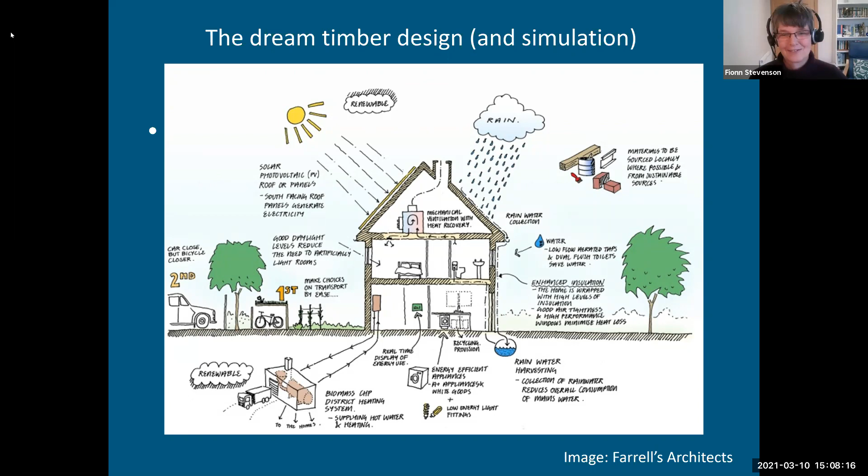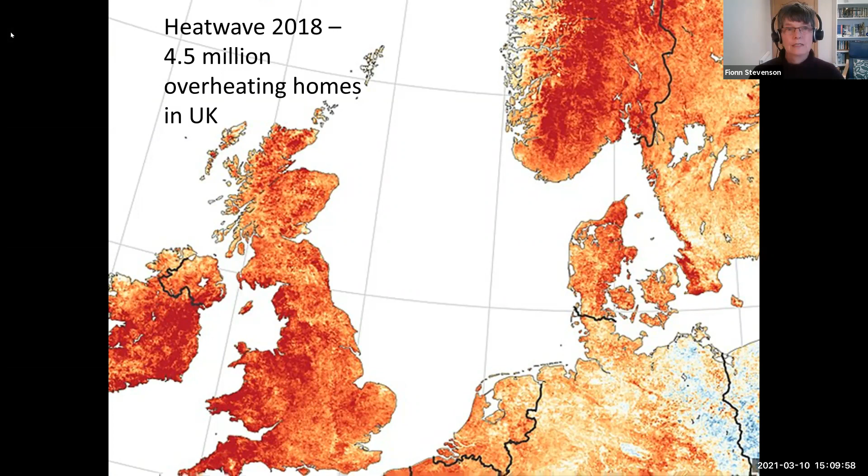Now, we've also got another energy implicated situation, which is the temperature rise on average across the world. And we had 4.5 million homes overheating just 3 years ago in the UK. And energy is also implicated in health issues. Fuel poverty is a major factor in housing. And often people try and save money, save energy, and reduce their heating. And that often has very dire implications in terms of potential mold issues, and mold spores cause asthma.

So we know our homes are underperforming, and translating that into an energy problem, we know from lots of research that's been done that homes in the UK very typically use twice as much energy as they're predicted to use. And the big debate is whether that is down to the building or down to the people or down to a combination of both. And my aim is to make sure that everybody agrees it's down to both.

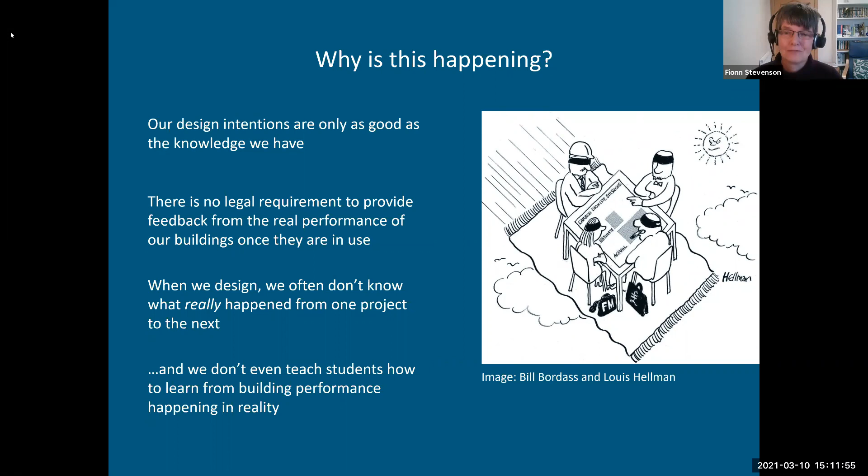And probably the biggest tragedy is that we don't even teach our students how to learn from building performance that's happening in reality. We teach our students about how to look at case studies. We teach our students environmental principles. But what we don't do is take them to buildings and demand that they actually carry out an environmental performance review of that building. That happens in very, very few schools of architecture.

So why should we be doing all this? It's blindingly obvious that, you know, if you carry out a performance evaluation of a building, you can improve both the building and the design process that was behind it. And you can improve both the product and process, the risks, the defects, the maintenance. You can also begin to future-proof it by understanding what's going on with the building for real. This makes happy people, and the happy people make happy customers. What does all this mean for energy?

Exactly the same, which is that in improving the process and the product, we can also help to reduce the energy demand, and we can help to eliminate unforeseen defects and unforeseen maintenance issues that increase energy demand.

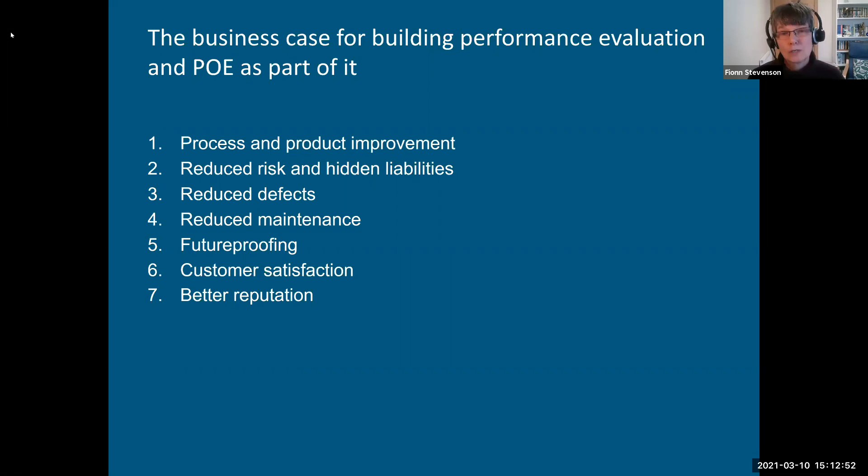So what I'm trying to do today is to steer us away from seeing energy as a single subject. Energy is implicated in the home everywhere and always. And that means really that we have to move beyond thinking just about energy to asking very, very broad questions. And these are 4 perennial questions that have been asked for decades now in post-occupancy evaluation.

Beyond understanding the energy demand, we need to know whether people's needs are being met. And we need to understand the problems that are happening now, but also how we can prevent future problems. And the real key contribution of doing post-occupancy evaluation, of looking at building performance for real, is that it helps us to validate the modeling that we're researching and producing, and it helps us to evaluate the simulation tools that we use. Without having that validation, these tools remain very, very blunt instruments.

So the basic approach that I would argue for is a multi-method, mixed methods research approach to thinking about building performance. And when we want to compare design intentions to reality, this means a mixed methods approach of both hard and soft data. And very often POE tends to fall on one side or the other. So we tend to get physical scientists doing the hard data, which is looking at the physical comfort, pollution, fabric performance, energy use, and water use.

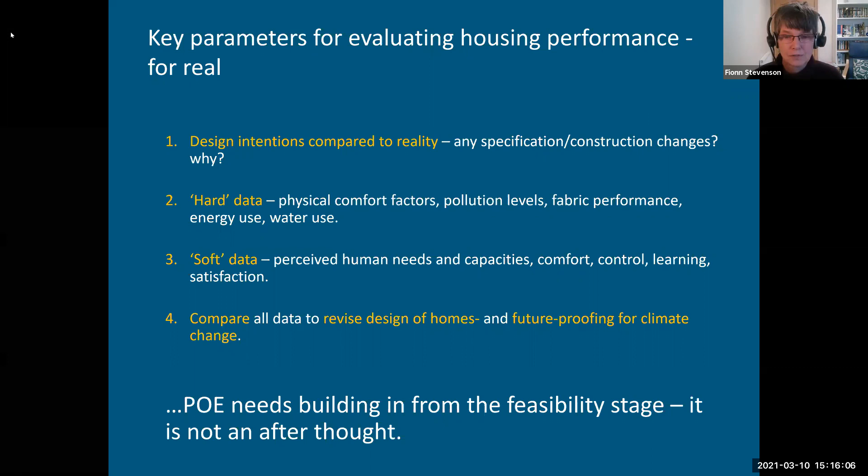So another big point I'd like to get across today is that when we're thinking about using the mixed methods, we really should start lightly, and we should only dig into monitoring and deeper forensics around building performance if it's really needed. And this was a lesson I learned from Adrian Leaman and Bill Bordass, who introduced me to post-occupancy evaluation by saying, look, Fionn, for God's sake, don't go out and cover a building in kit and monitor it to death. That's really not the point.

The point is not to monitor what's happening every day as a routine. All that does is tell you every day what's happening. And if it's the same every day, then it's the same and the same. The point is to design your research in such a way that it throws up the exceptions.

And it's a big challenge for us as researchers. We have limited amounts of money. Kit is very expensive. And one of our challenges is how to be nimble and effective with small amounts of money, to design research that can have great impact. And so my argument today is that very often a light touch POE can have significant impact, even though very often we're encouraged to go for the forensic level of POE.

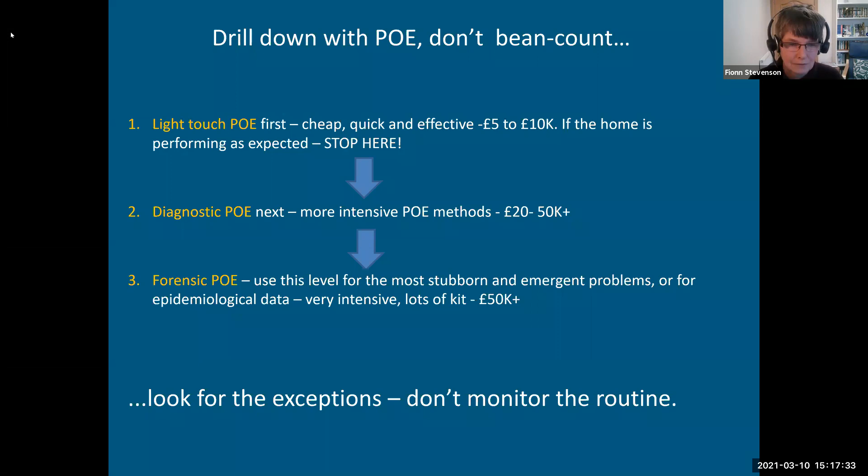So I want to introduce you to the 6 actions that I outline in my book, which are the very lightest touch of POE that I think is sensible. And basically, they're set out in a specific order, that you should carry these methods out in this particular order, because each method builds on the previous method and they all inform each other.

And so the first method is the audit, to actually understand what you have in front of you in terms of the original design intentions. And that means looking at the drawings and documentation. Once you've scrutinized those and looked for any changes that may have happened whilst the building was being built, you're then in a position to look more intelligently at any energy or water use audit that you undertake.

And once you've done that, and you understand a bit about what the energy use is and what the drawings are, you're then in a position to do some thermographic work to actually look at how the fabric is performing. And it's really important to do this not just on the outside, but very much on the inside as well, because very often it's the furniture arrangements that can have a significant impact.

And once you've understood the kind of physics of the situation, you're then in a position to engage with the social side. And this is why it's so important to carry out the survey of the inhabitants after you've understood the initial physics. Because when you get the results back from the survey, you can triangulate them against what you already know about the building. And that makes the analysis of any social questionnaire much, much more powerful.

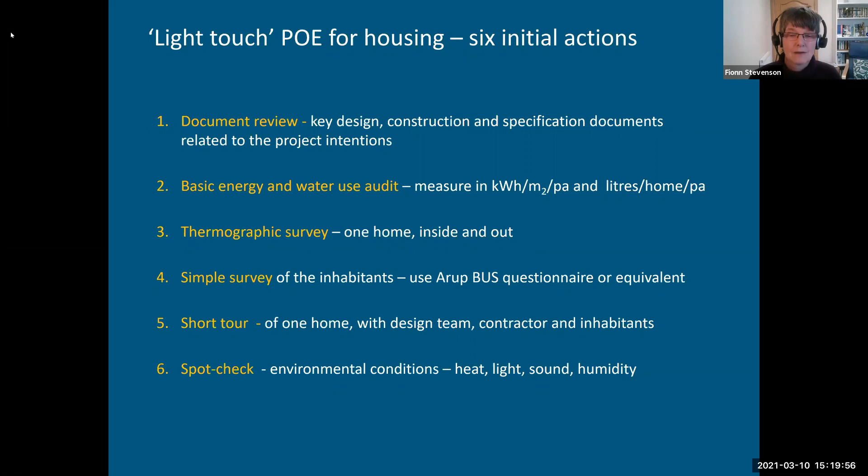And whilst you're there, you can do some very simple spot checks. And these are the kind of spot checks that really everybody should be doing nowadays as a matter of course. So thermography is now relatively cheap and effective. I would say it's probably not simple in terms of it does need expertise to carry it out, but the results, as you can see in this image, are indeed very simple. It's very quick to see from the red in the camera where the insulation is simply missing.

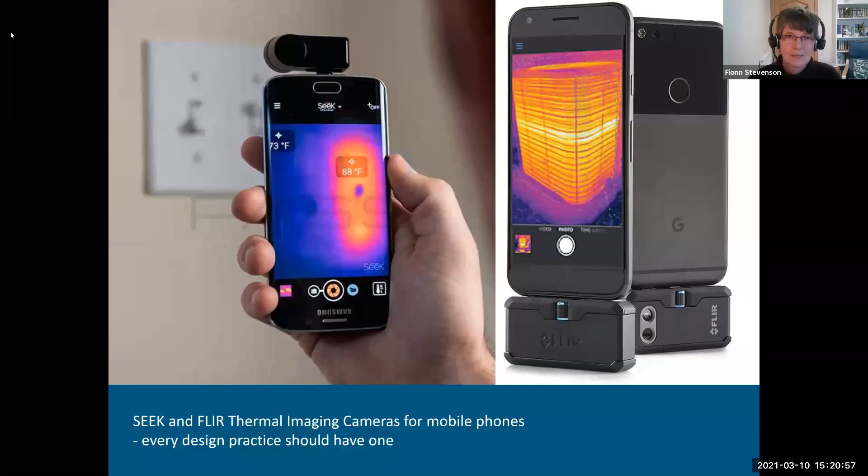So this is our building stethoscope, and as architects, we should treat our buildings as patients, and we should always check their pulse, but we should also check whether they're still breathing, and we should check whether the skin is intact. And the thermography can really act as a good stethoscope in that regard to take the feeling of the building. And the great news is we can do this now with technology that can clip onto our phones. And this is the kind of kit we give our students now.

Very simple POE kit, which can just quickly do a very rough check of light, temperature, relative humidity, and decibels. Not particularly accurate, but can often be a very quick validation of what an occupant is saying. If an occupant is saying, I feel really hot in here, and the temperature is actually only 21, then you know that you're probably dealing with a building that is performing okay, but an occupant that is particularly sensitive. And it's these cross checks that are so important.

So I'm going to just take you through a really quick case study to show you how this works in practice. So this was a retrofit of a 1960s block by a very well-known housing developer. And we started off with the light touch approach, and we ended up having to be quite diagnostic. And the three key issues that came out here, which were quite disturbing, were severe overheating, the fact that there was a single aspect plan, which I think is awful, actually. I think we should ban single aspect plans. The Victorians introduced them as a means of compressing housing, and we're seeing them come back today.

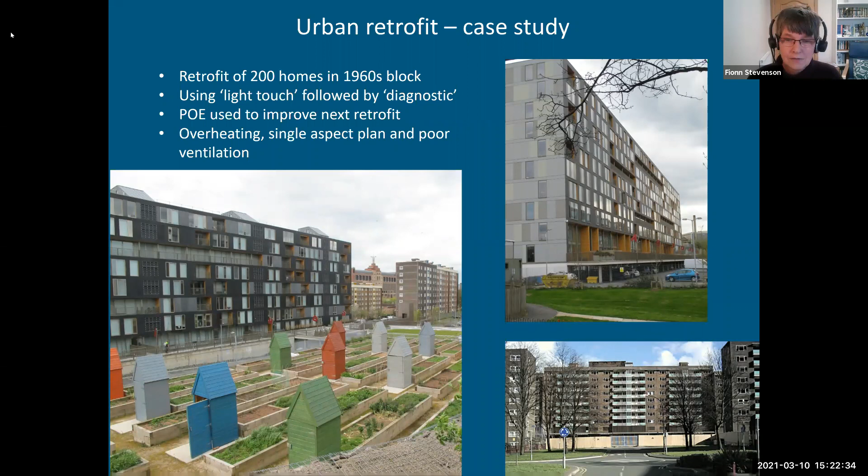And I think Dean introduced me as someone political, and I am political. I do think that the current government encouragement of single aspect as a means of increasing density is awful, because it gets rid of cross ventilation and relies on mechanical ventilation. It's non-passive. So there's very poor ventilation in this design as well.

So this is what we found, and we identified this initially from the light touch and the inhabitants, who let us know in no uncertain terms that they were too hot, and that they couldn't open the windows more than 100 millimeters. When we looked around, we could see there were no trickle vents, and it very quickly became evident to us that the only route of ventilation was from the front door to the kitchen, and it completely bypassed the living area and the bedroom areas, which is actually probably where it's most needed. So we had a ventilation bypass happening here, and this was pretty awful in terms of the carbon dioxide levels that we were getting in the bedrooms, which were really quite high.

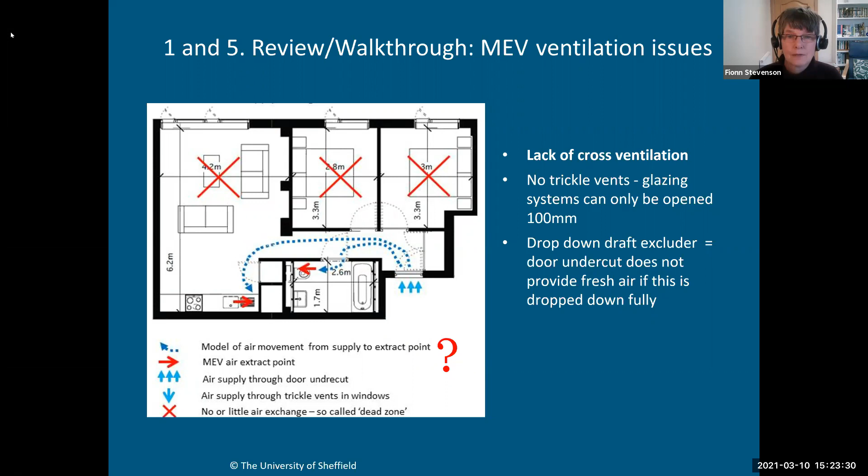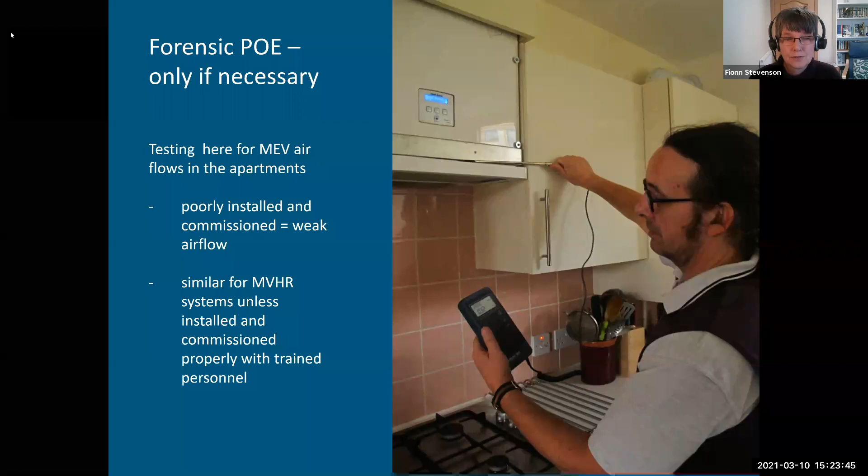Readings of 2,000, 2,500, really pretty high. And so we had to dig in a bit more, and we got forensic, and we did some flow testing, and we discovered that the mechanical ventilation was poorly installed, poorly commissioned, lots of problems.

And how does all this impact on energy? Well, this was the energy results we got when we did the energy audit. So this was just a sample of 17 homes. And you can see here there's a massive variation in energy use. And the argument out there is that, if we fix the fabric, then we need to educate the occupants.

And this always drives me round the bend, because in my experience of having done more than 100 of these kinds of projects and looking at buildings after they've been occupied, actually very often it's the residents or the inhabitants that are at the end of the problems, and they're not causing the problems. The problems are happening to them.

And it's very often either design faults where they can't use the equipment because it's poorly designed or poorly illustrated, or it might be construction faults where they simply can't access something because the contractor's changed a detail, or it might be another design fault where, again, they can't access equipment properly or maintain it properly.

And very often people, if they are behaving in certain ways, it's because they've been instructed to do so. So, for example, with mechanical ventilation, they are instructed to keep the windows closed all the time, or they are instructed to leave the mechanical ventilation on all the time. So people are conditioned by the building, and I think that's an interesting way of thinking about buildings.

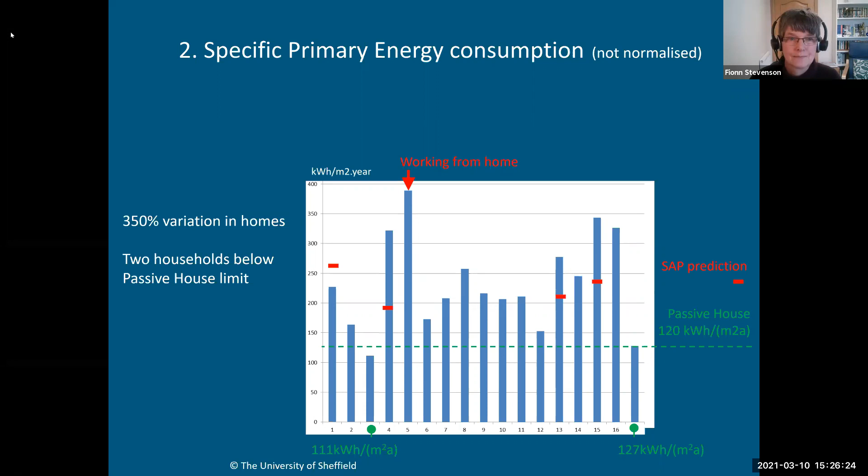And I guess what's interesting with this slide is just looking there, there's one person there working from home, and that's 400 kilowatt hours per year. That's the highest one. So obviously people's lifestyles do affect the energy. There's no doubt about that. And the point is that we need to be able to disaggregate our understanding of people's lifestyles and where the design faults are.

So we did some thermography, and that threw up some very interesting physics. We discovered a stack effect in the core of the block, and that of course meant that people at the top were benefiting from greater heat in the summer, which was too hot for them, but also greater heat in the winter, which was nice, made it cheaper.

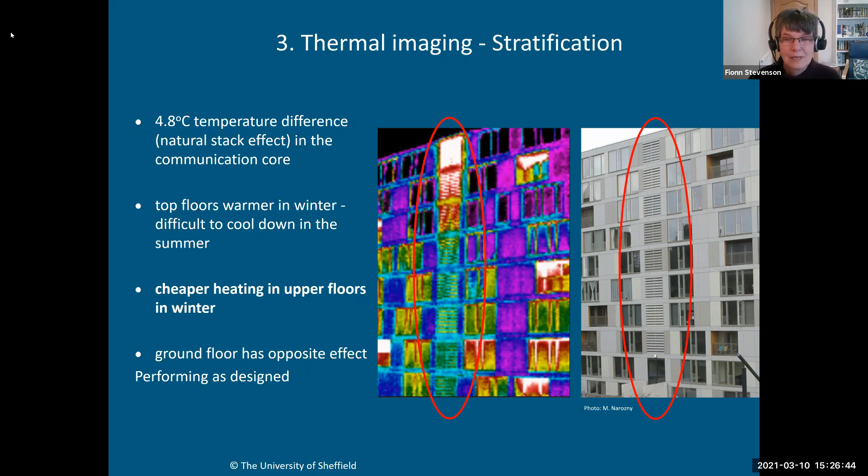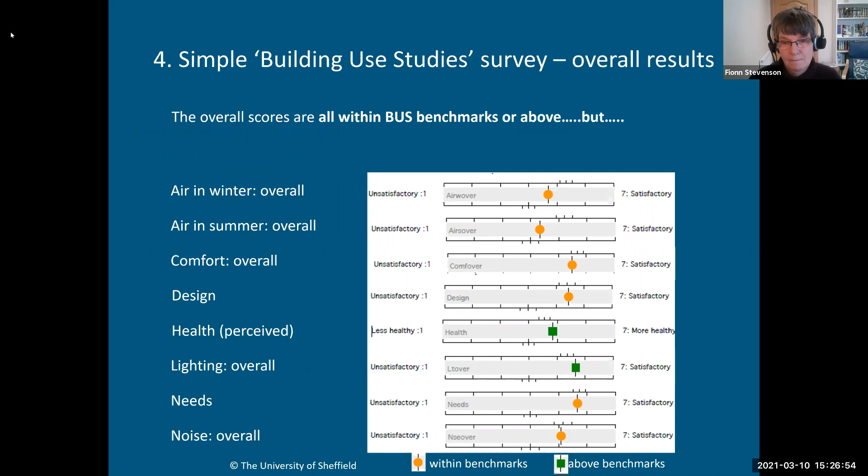The user survey tended to show that everything was okay. But actually, when we dug in, we discovered that there was a massive issue with overheating in the summer and cooling in the winter. And this is a very common effect called the forgiveness factor, where if you ask someone how they are, are you fine? How are you? And they say, oh, I'm fine. That's a very big, broad question.

But then if you ask people a more specific question, like, how's your back today? They'll say, oh, it's a little bit painful, but it'll be fine. So we do know that when we ask specific questions about buildings, we tend to get more accurate answers.

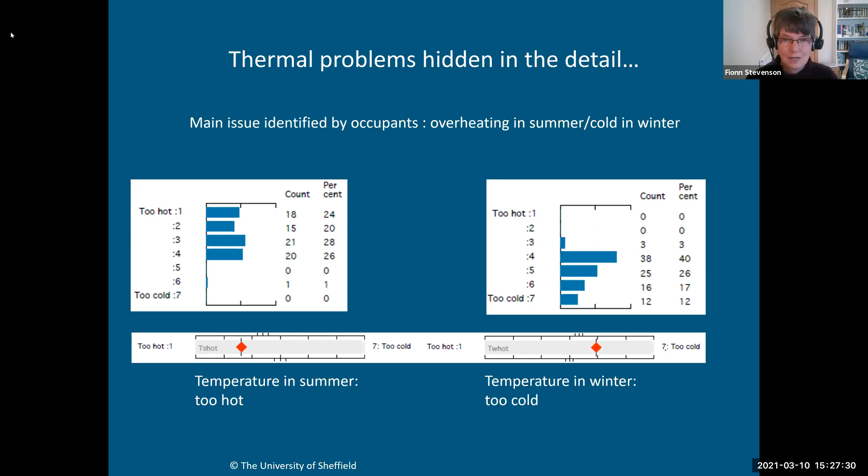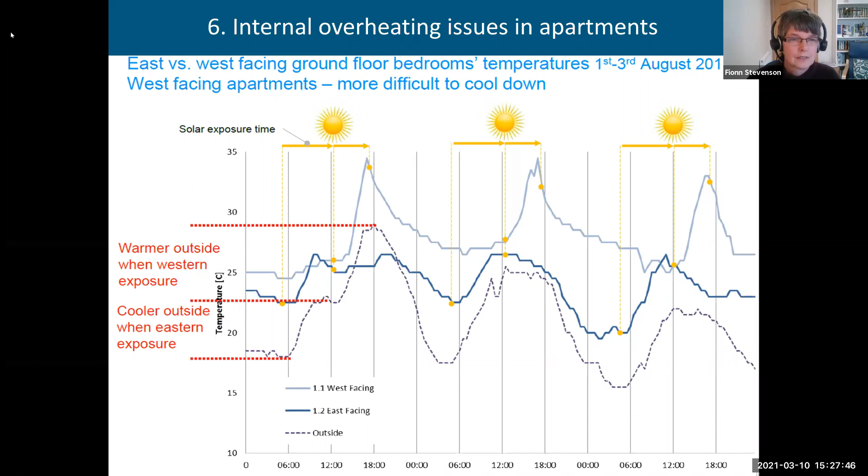And so when we were doing the surveying and the monitoring, we were getting temperatures of 35 degrees in the bedrooms, which was really shocking, when the temperature outside was a good 7 degrees lower. So that was really quite problematic.

And when we looked into this more deeply, we realized there were a number of different issues, and we were only able to establish the cause of the problems by using this mixed methods approach. We could not have arrived at the conclusions we got to without using all the methods. And it came back to albedo effects. It came back to the fact that there was this massive tarmac car park, black surface that was reflecting heat on the west side of the building.

And bear in mind, again, we've got these single aspect flats. So every room faces west. So the sun is pouring in the afternoon in the west, doubled up by the car park heat, doubled up by the fact that there were huge windows that couldn't be opened or opened very, very little, with absolutely no shading. So no wonder it was overheating.

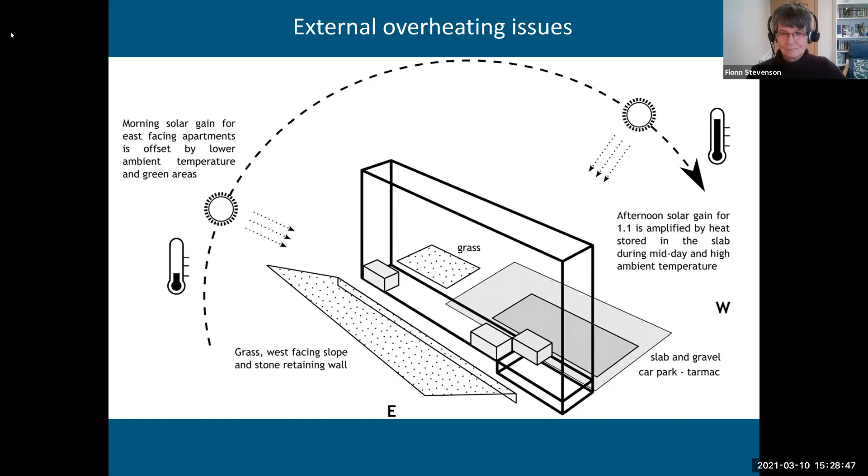And these problems continue. That was a retrofit, but these problems continue to haunt us also in new build, even in passive house homes, which are meant to be state of the art. We are still seeing problems with the usability of the technology. And from a theoretical point of view, I think what's important here is to factor in the theoretical approaches that we use. And with a mixed methods approach, I think it's really important to combine the social science understanding with the physics.

And that actually means dragging those team of researchers into a room together and getting them to talk to each other until they understand each other. Because if you produce separate reports for the social science side and the physics side, then you miss out on a lot of the synergistic results that you can get from this kind of work.

I use practice theory from social science. That's Schatzkian theory, which tends to not think of the users as a subject, but to look at inhabitants and users as being implicated with the building. So the building and the users are considered together as a single network, a single entity. And, you know, the building is an actor that affects the person, the person is an actor that affects the building, the building can learn from the person, the person can learn from the building. So it's a very, very deeply intertwined relationship.

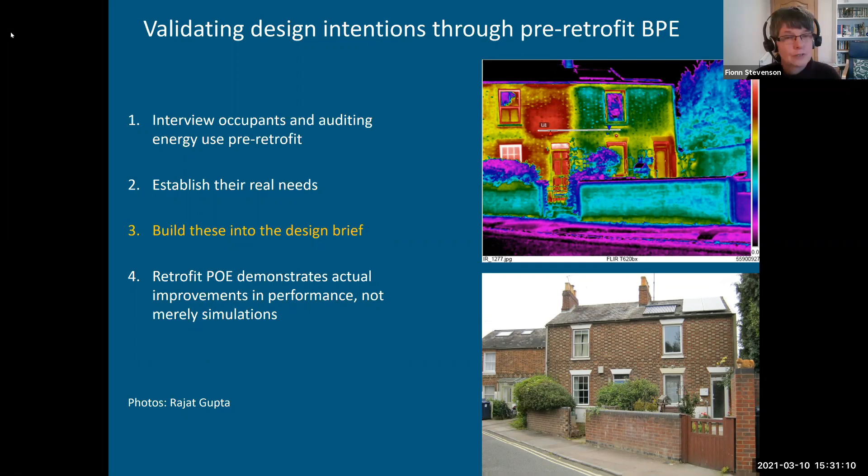The other great way we can use building performance is to pre-validate retrofit. So this was a project done by Professor Rajat Gupta, where he actually interviewed the occupants before the retrofit and audited the energy before the retrofit to give himself firm benchmarks before actually doing anything about the retrofit, and that worked really well. So I'm going to rush on quickly now because there's relatively little time.

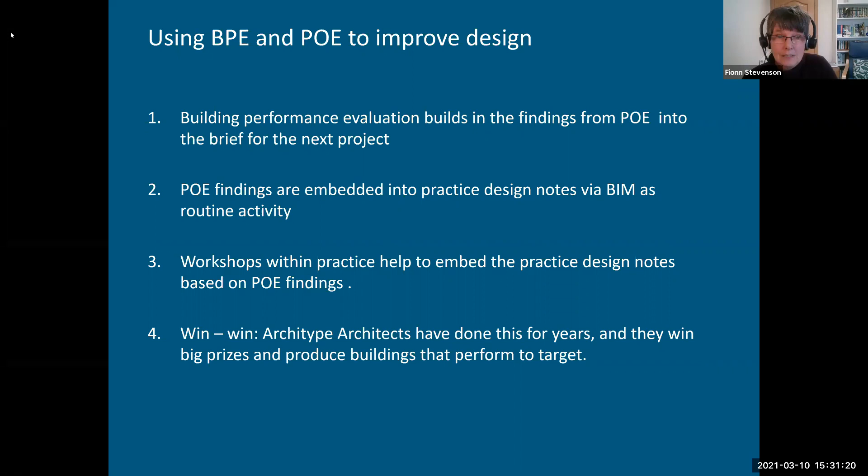So basically I'm saying that POE can improve design, and very importantly, it can empower inhabitants through co-design. So particularly in social housing, where we know the residents that are going to move in, whether they're co-housing or cooperatives or housing associations, we can actually engage with those residents even before we start the post-occupancy evaluation, and they can be part of designing the methodology for the post-occupancy evaluation. And that's something that's rarely done, and I'd love to see more of.

Because if inhabitants are brought into the POE process from the very beginning, they are exceptionally responsive and engaged when it actually happens. So this is the feedback process. If you engage in feedback and bring it back to the brief, you get a virtuous circle, or what I call an organizational smile. There's good guidance on these methods out there now. Apart from my book, there's also guidance now being produced online.

The book, in true Cambridge style, is not simply capturing today. As always with Cambridge, we think of our history. And so the early part of the book does take a retrospective historical look at the history of post-occupancy to see where it came from. And that's really so that we don't reinvent the wheel. But it does also look to the future, and it looks to future challenges, particularly around future proofing and thinking about energy in terms of the resilience that we now need for housing.

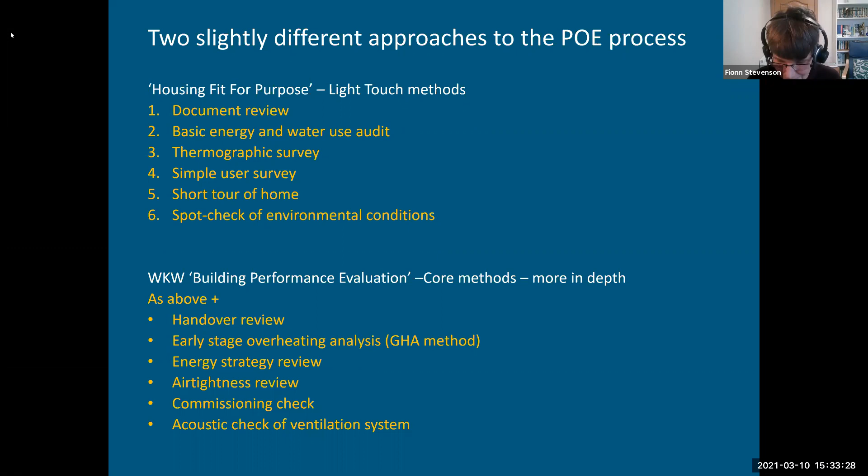So I'm also working as a campaigns director for this organization, which recently carried out a state-of-the-art review of performance evaluation of new homes. So that's also worth a look at. And we're very interested to work with Cambridge University, with all the universities, in terms of developing a strong network, a strong community of practice around building performance.

So just to conclude, why haven't we been doing this? POE has been out there for decades, and it just always fascinates me. We have all the technology and guidance we need. We have good housing models, but the trouble is we just don't do it. And we've only got 10 years to get the housing performance right. So really, I guess I'm just encouraging everyone to do it.

And for you as researchers, if you know people who are involved in building design, if you yourself are involved in building design, or if you're involved in any building projects, please, please, please tell everybody to go out there and carry out an evaluation in reality. Yeah, so I hope that's been a quick gallop through the kind of work that I do. I haven't been particularly theoretical, but I'm very happy to move on to the deeper theories behind the work that I do, in terms of linking physical performance with social performance.